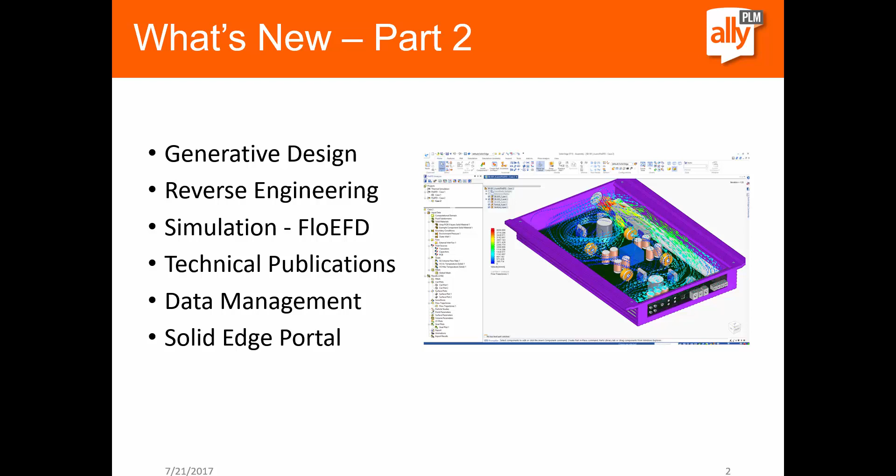The first thing I want to talk about is generative design. So welcome to the next generation of design.

If you consider the traditional methods of designing, you design your model to be as strong as possible to withstand the stresses applied to it, but you also want it as lightweight as possible to save on material cost. Once designed, you usually run a stress analysis to make sure it meets all the goals you've set for the part.

With generative design, we spend a minimal amount of time designing the actual features, get more of an overall shape created, add in a couple features like mounting locations, and then let generative design create the model for us so we don't have to spend as much time on the design work.

We set up those specific mounting points, apply some different forces, and let the software develop the part for us. This should save time on creating models, and it also does the stress analysis at the same time.

ST10 Generative Design has its own ribbon tab. All the commands are inactive until you go in and create a new study. If you haven't applied a material yet, it'll ask you to apply one. We also have a docking window on the side of the screen, which lists any loads or constraints you've applied to the model.

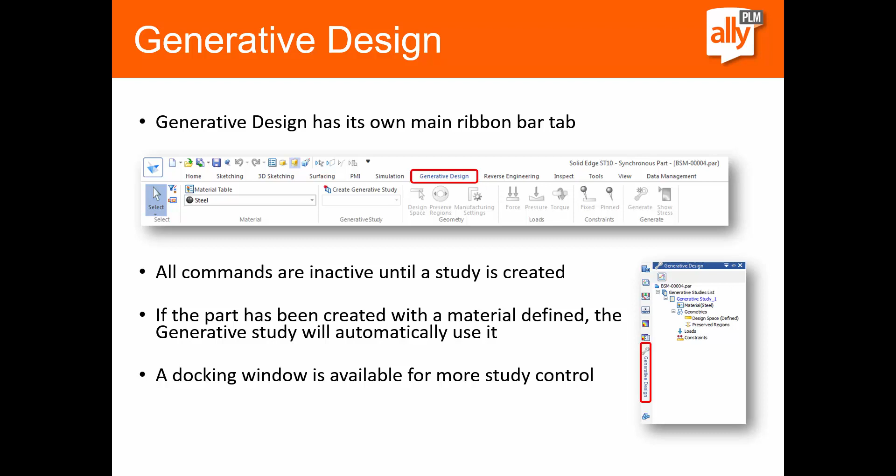Looking closer at some of the options in the menu, we have a design space option. This is available if it's a multi-body part. If it only has a single design body present in the file, then we don't need to use this. But if you have a multi-body part, you can pick which body you want to do the analysis on.

Then we can determine what regions we want to preserve. This is things like faces or holes we want to preserve so they don't get optimized, meaning we don't want material removed from that location. This is mainly for things like mounting holes and mounting locations.

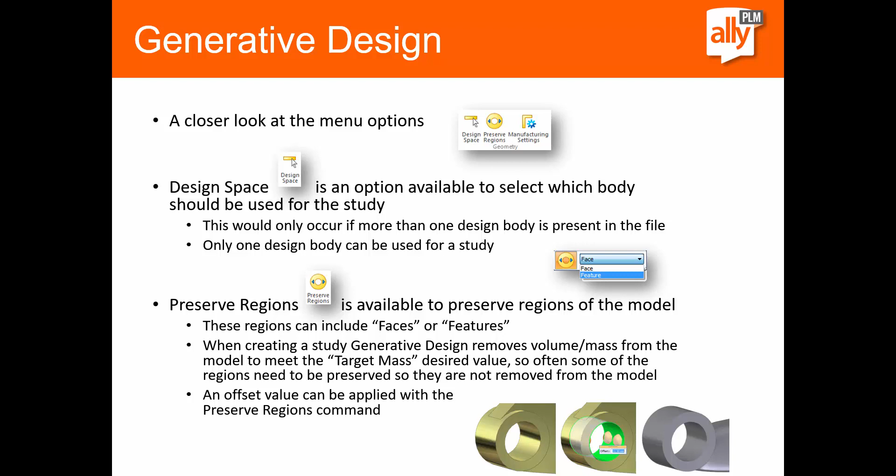There is a setting for manufacturing. This is used maybe if this is going to be a cast or injection molded part. We want to be able to get this out of the mold, so we can determine which way the overhang prevention should be, and we can remove any internal voids as well.

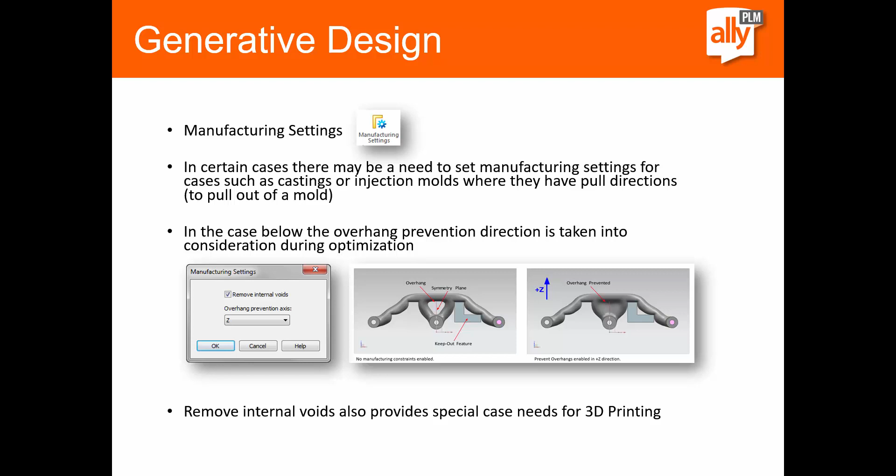Next, we can apply our loads and constraints to the model. We choose, just like in simulation, the types of forces and constraints we want to apply. In the picture at the bottom, we've applied two forces to the outside faces, pulling away from the model, and you see this is the finished generative model.

Also, in the middle of the hole, that is a preserved region, so we notice the hole maintains its shape, and we have a nice little offset distance away from it to keep some thickness around it.

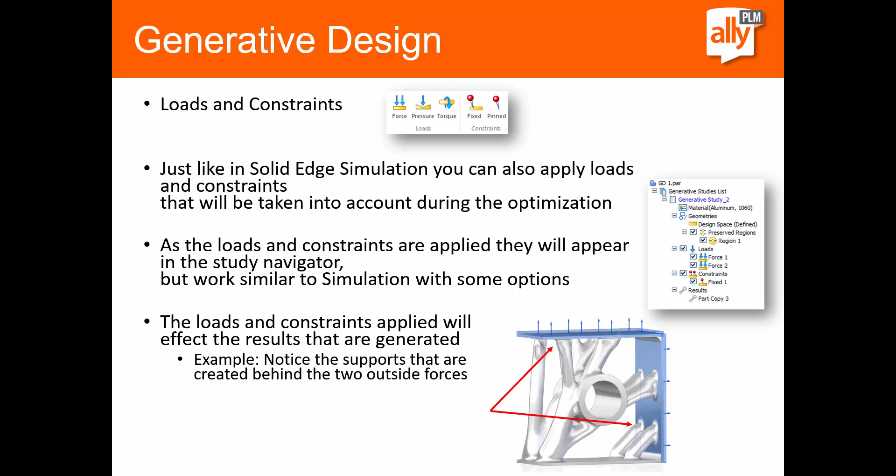Once you get all your loads and constraints applied to the model, we then generate the study. When you hit the generate button, an options window pops up. We can set the study quality, choose our target mass—either by a percentage or by typing in an actual target mass value—and then we have things like yield stress, allowable stress, and factor of safety down at the bottom as well.

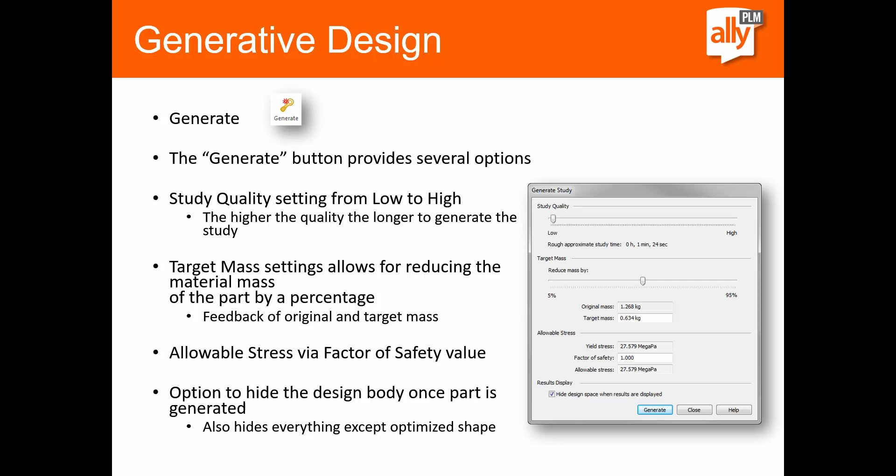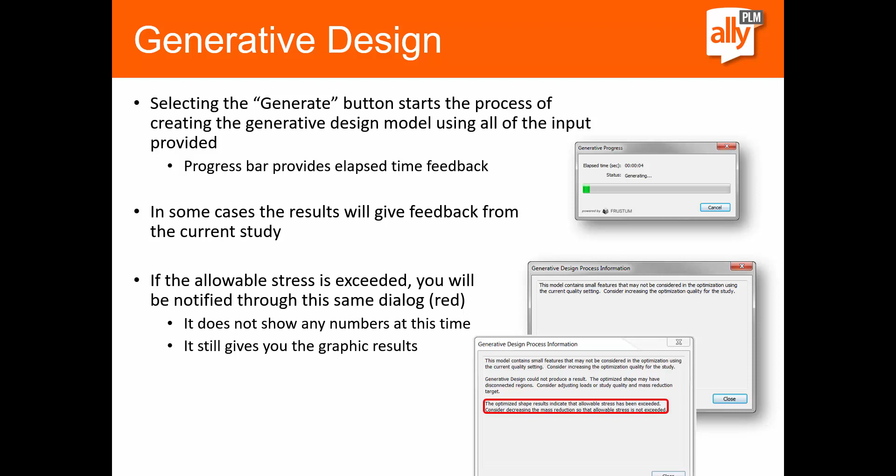When you run the generate button, it'll go through the process of creating the generative design model using all those input values that you put in there. You'll get a little feedback when it's done, just telling you maybe some features couldn't be optimized, it was too small of a face, and so on.

And if it fails or can't optimize it, it'll tell you that as well. Once it's done though, we can show the results. Again, this is a stress type analysis, so we get to actually see those stresses on the finished generative model. So let's go ahead and take a look at how this works.

For our example here, we're going to be taking a look at the Bernina sewing machine, and we're going to switch our display configuration to take a look inside at the main frame. And what we're going to do is create a generative design study on one of the parts. I've got kind of a base part designed already that's going to fit between all of these components, so I'm going to turn that on.

And we see again, it's really just a basic shape. We've got some of the holes built into it where we need to maybe mount it or have some of the shafts go through. And what we want to do is create a more lightweight design, obviously to save on some material costs.

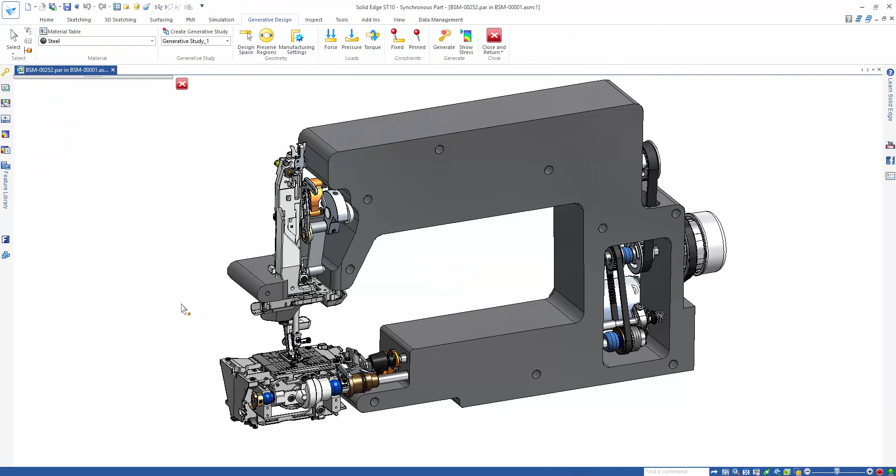So I'm going to edit into this part file. We'll go ahead and hide those background components, and you see up here I'm already up on the Generative Design tab, so this will be included in here for you to use. I've got a material applied.

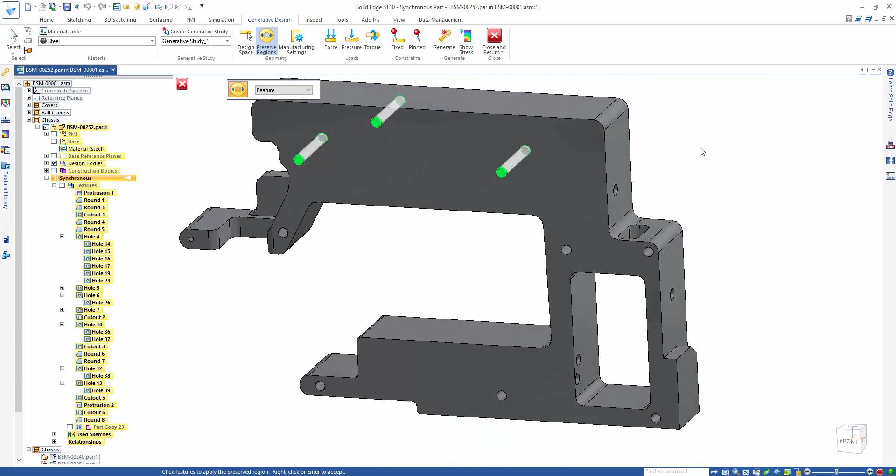We've already started one of our studies, so we can go through then and start to define maybe some regions we want to preserve. So if I do the Preserve Regions command, we get to pick either faces or entire features if we want to preserve. So I'll just go in with the feature option, pick some of the holes in here that I want to preserve. Again, maybe those are some sort of mounting holes, or these ones over on the side, or where some of the shafts run through. So I just want to preserve those.

Next thing I can do is apply maybe a force. So we're going to have force applied actually down on this face. I'm just going to flip it so our force is pointing down, and obviously you can see we can input whatever force value we need down there in the value box.

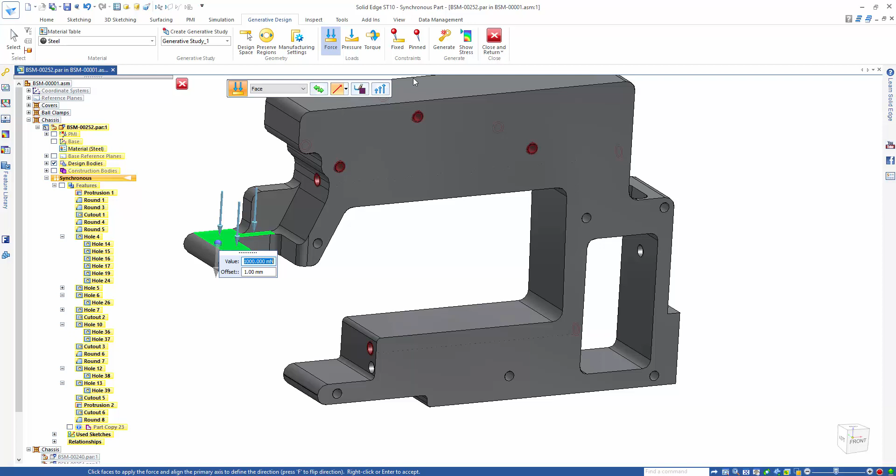Next, I'm going to fix one of the faces. I don't want this face to move. I want it to stay stationary, so we're just going to fix that one in place.

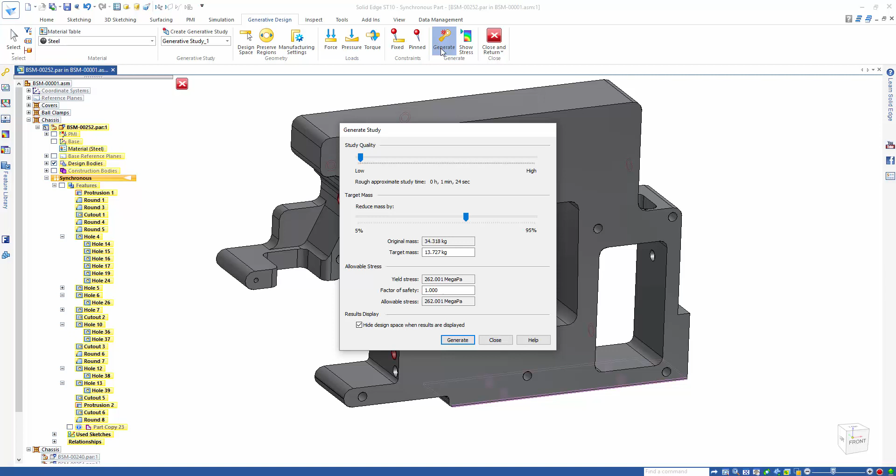Once you get all of that applied, we can then go in and hit Generate. And in the Generate option, we get to pick our study quality. We can slide that up and down. You select how we want to reduce our mass by maybe a percentage or a target mass that we want, and then factor of safety, and we would hit, obviously, Generate.

I've already got this done. It does take a little bit of time, so I'm simply going to turn that on. So we can see it there. I'm going to hide these other constraints we've applied. And we see our results.

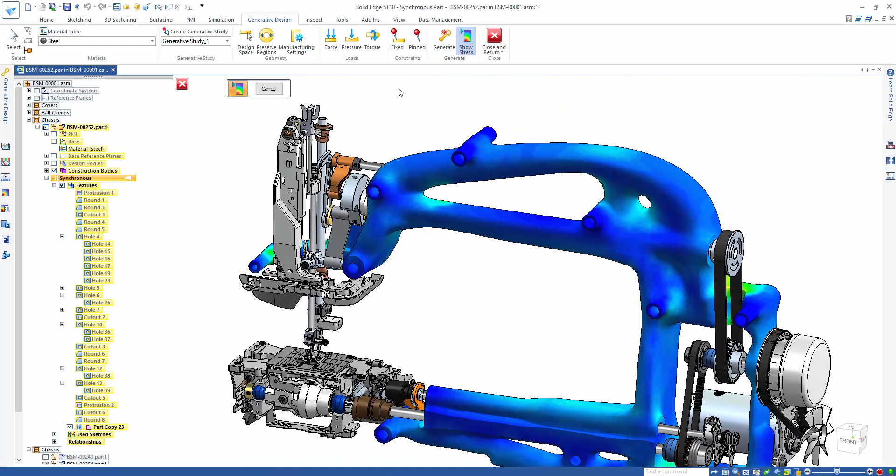And if we go ahead and turn back on the background components, we can see how it preserved those holes we selected, but it removed geometry to make this more lightweight, yet still strong in the way that we need it to be. If we turn on the stresses, we can then also see kind of where maybe some of the weak points are, and we could decide, maybe I need to preserve some other regions over in this area so we don't have such high stress there.

So you can go back in and run the study again and get a different body, and you can pick and choose which one you want to use.

To use this actually in our assembly then, we need to detach the body from the study. It's currently just a mesh body. It's just construction geometry, so I'm going to detach it. That will allow me then to come in and convert that construction body to a solid body.

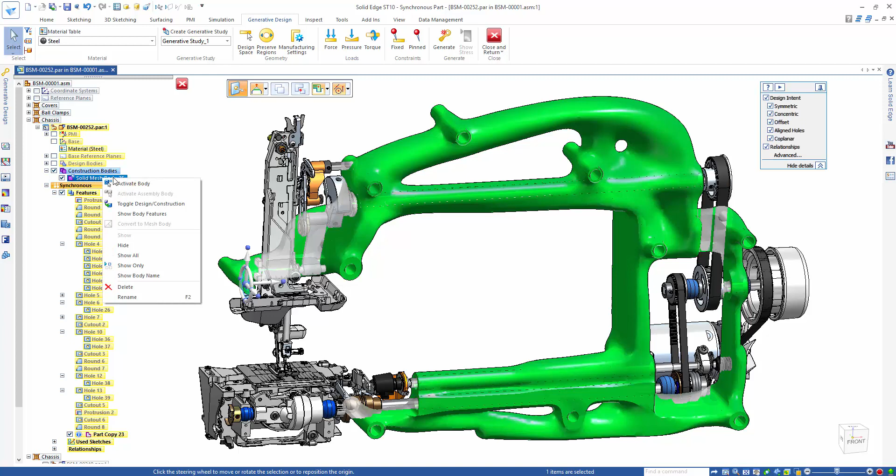So I'm going to right click and toggle it to Design. And the other body, that square one that we started with, I'm just going to toggle that to construction so we don't have to see it right now. And then there we go. We can see our solid mesh design body.

We're going to take a look at another example for that. We'll zoom in on this part up here. I'm actually going to open this guy up.

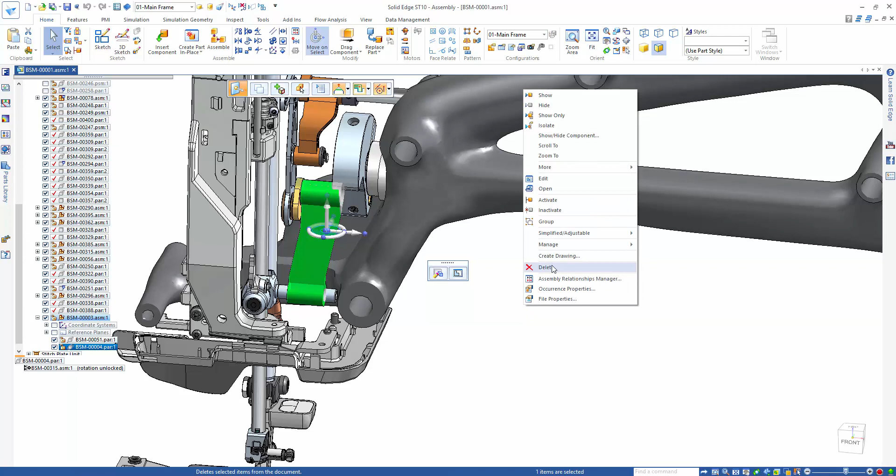We're going to do another generative design study here. So I'm going to pick a material this time, maybe just a steel. We'll hit Create Generative Study. And now again, we get to decide where we want to preserve regions, where we want to apply forces, and I'm going to put a force going through the center of this hole with an offset of 2 millimeters, just so we ensure we get the outside faces of that cylinder as well. Same thing with the fixed constraint over here on this side. We'll do an offset there as well of 2 millimeters.

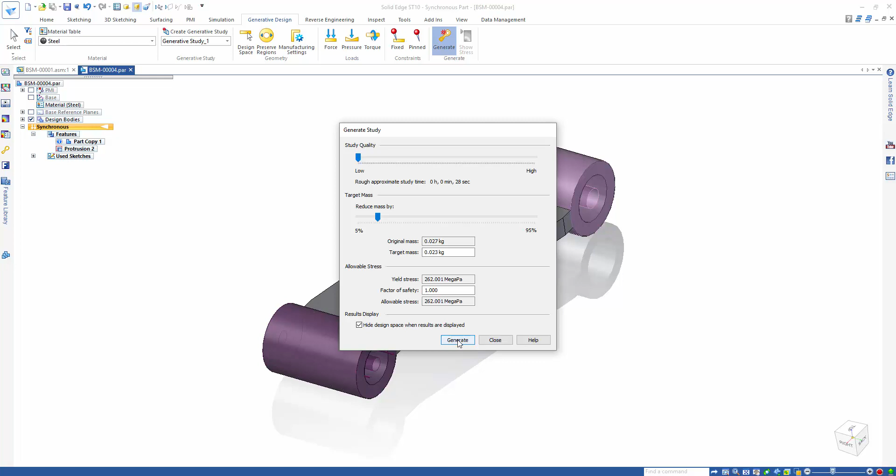If we go into the Generate window, I'm going to just slide this all the way down to the lowest setting, just so it goes a little faster for you guys to see it, and we'll choose to reduce the mass by 15%. And if we hit Generate, it'll go through and generate our generative design. So what it's doing, it's meshing the model. So it's doing a simulation type solve. It's tessellating it. Then it's going to go through and try to optimize that and reduce the most amount of material that it can, while still maintaining that factor of safety that we needed to maintain the yield stress that we had in there as well.

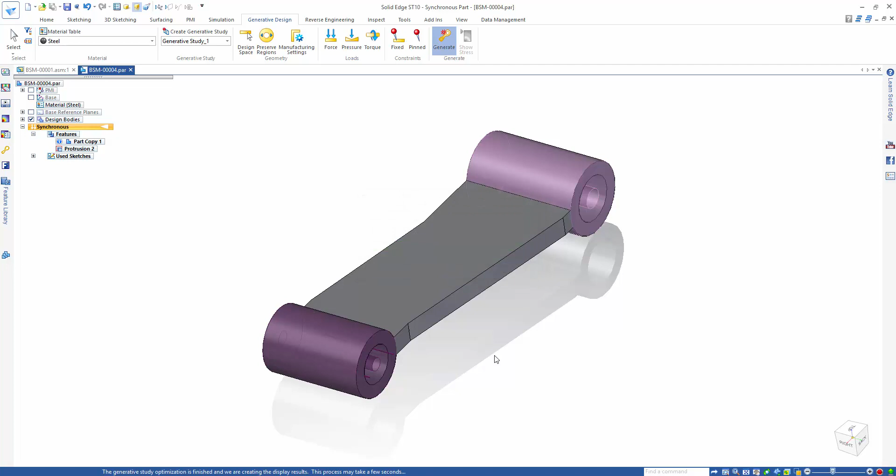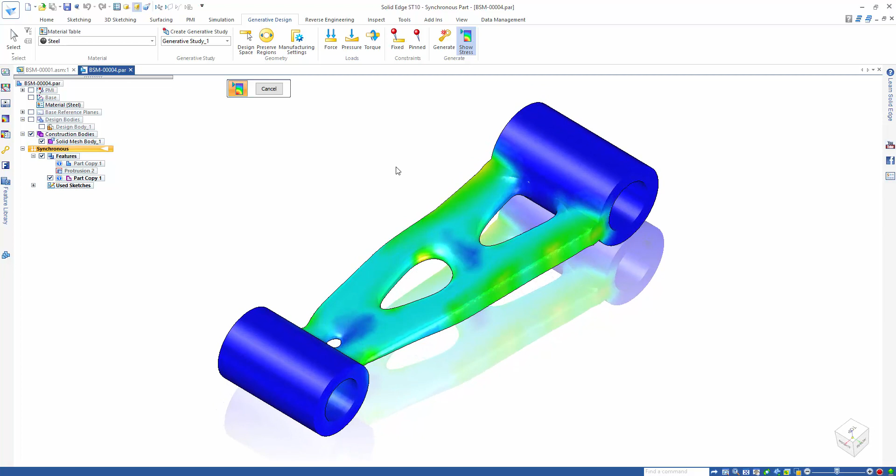So there we go, it finished. We can see that it pops up a little window saying that maybe it couldn't go through and optimize every little face. There are some small corners or things it couldn't do. That's okay, we'll just hit close on that for now. And we can see our finished part. So pretty cool. We can then go in and show the stresses. We can see where the highest stress points are. If we're not happy with that, we can always go back in and regenerate the study, adjust some of our inputs, and get a new design.

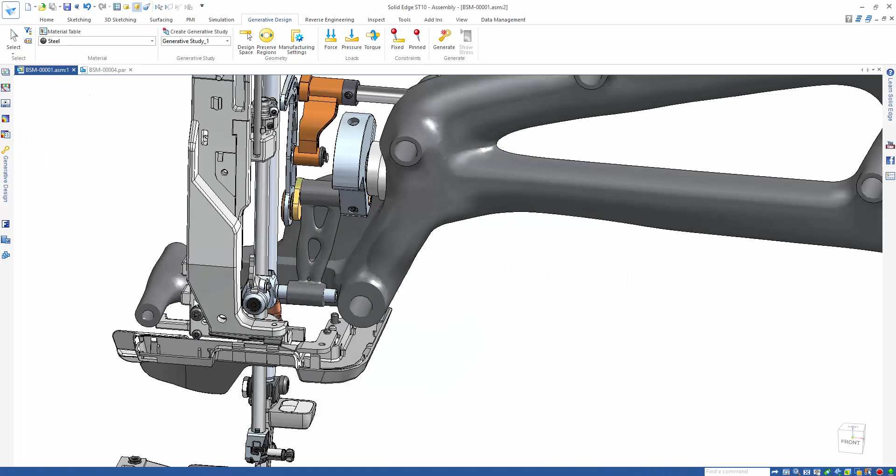Just like with the last one, I'm going to detach that finished generative body from the study, convert that construction body to a design body so that we can then see it and use it back over in our assembly. So that's now our design body, and if we head back over into the assembly, there's that finished generative design model. So some really cool stuff here. I've had some time to be able to 3D print some of these parts as well, which is awesome. This works perfect for that. So hopefully this will give you guys maybe an idea of how to reduce mass on your parts, where you can remove material from, and how to end up with some really cool parts.

So our next topic inside of ST10 is reverse engineering. I know a lot of people have been asking for this for a while. It's now here. It's included inside of ST10. This is available on ST9 as a beta add-on, so you can go download this today and add it into ST9 and try it out. But they are working on it more. It'll be added here in ST10. It's really great. You guys will be able to bring in and kind of reverse engineer some parts, any 3D scan data, anything like that. We can bring it into Solid Edge. We can build surfaces on top of it, and we can use that inside of our models.

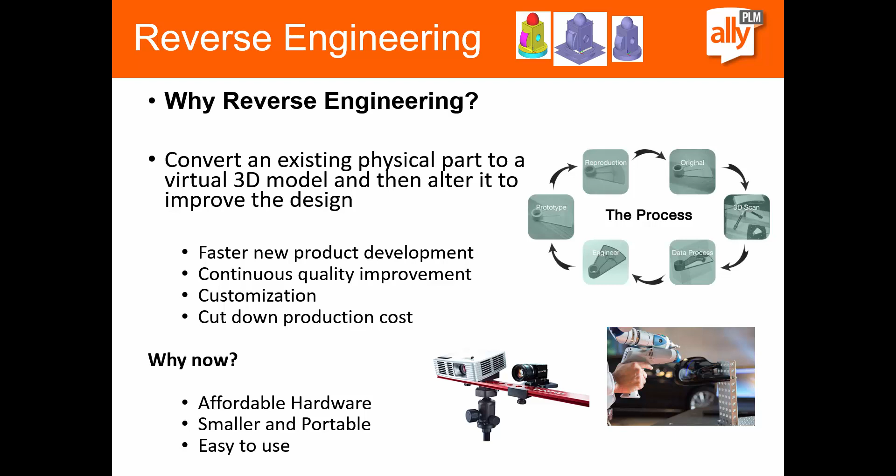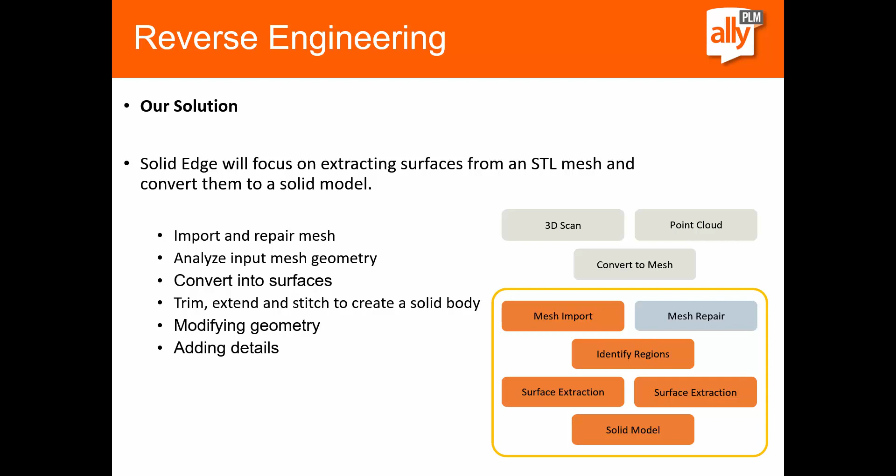So the solution here, again, inside of ST10, we take those STL mesh files, 3D scanned in data, point cloud data, and we can convert that using some commands here that are built into reverse engineering. We can import the mesh, we repair the mesh, we then analyze it and identify different regions on top of it. From those different regions, we extract surfaces. After we get all of our surfaces extracted, we then do some surface trimming and stitching, and we create then a solid model. Here's a couple examples of what that kind of looks like.

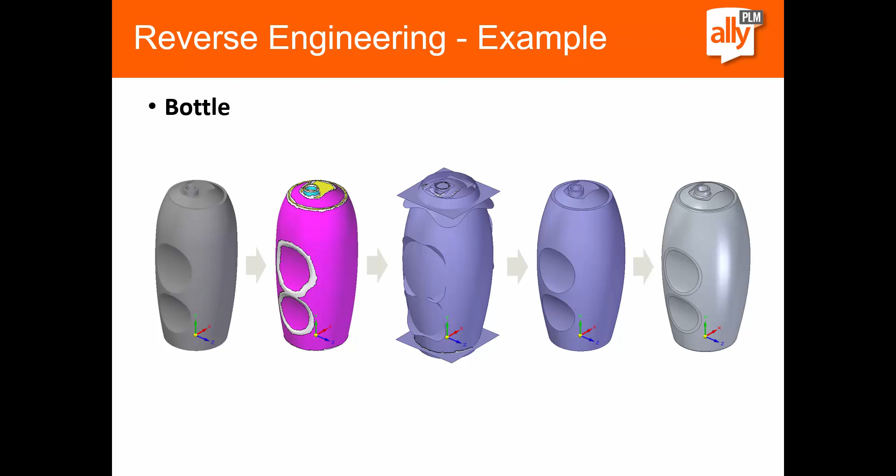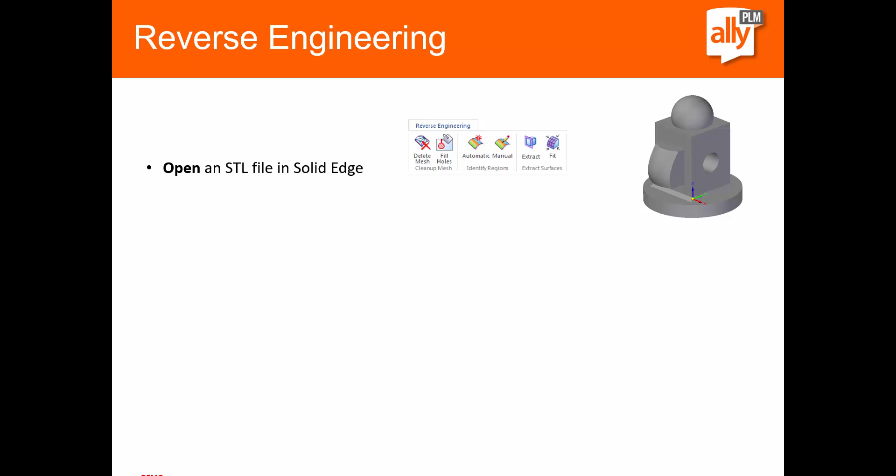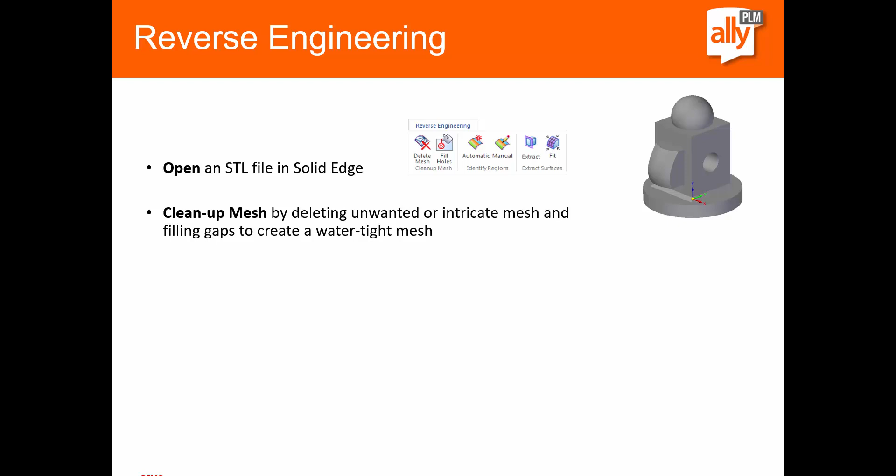So here we see the reverse engineering tab in the ribbon, and we have a couple commands. We go through and we open up our STL file inside of Solid Edge. Then we try to clean up the mesh by deleting any unwanted surfaces or intricate mesh that might be hard to identify as a region. We fill those gaps in with the fill holes command.

We can then run the identify regions, doing the automatic or the manual option to identify planes, cylinders, spheres, B-spline surfaces, etc. We then extract surfaces using the extract command, but we can go in and fit surfaces manually as well. Then we'll trim those and modify those using your standard surfacing commands, and then stitch it together and create a design body. So some really nice commands here that allow us to work with that STL data. So we're going to go ahead and take a look at an example of that.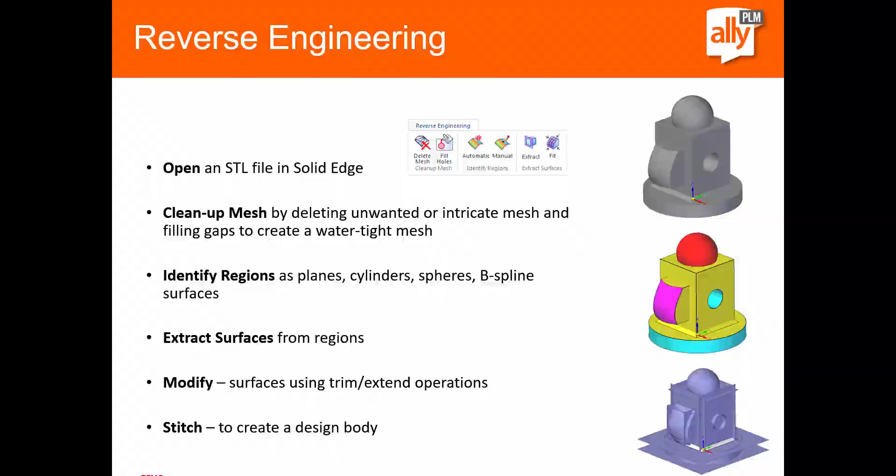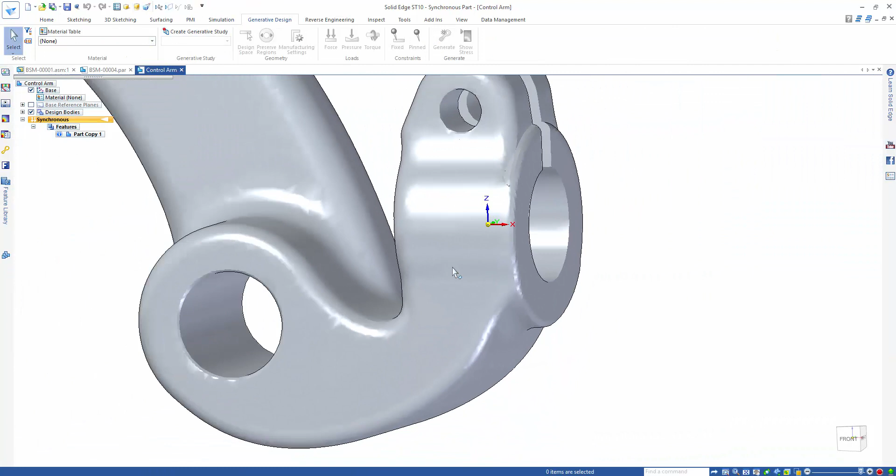For our example, we're going to open up actually an STL file. So I'm going to go into my folder here and select an STL file, and we're going to open that up just in an ISO part template. And we can see the part file here. So it's mesh data, and what we want to do is take that mesh or STL data and make some changes to it. So one of the first things we want to do is maybe delete this mounting hole up here at the top.

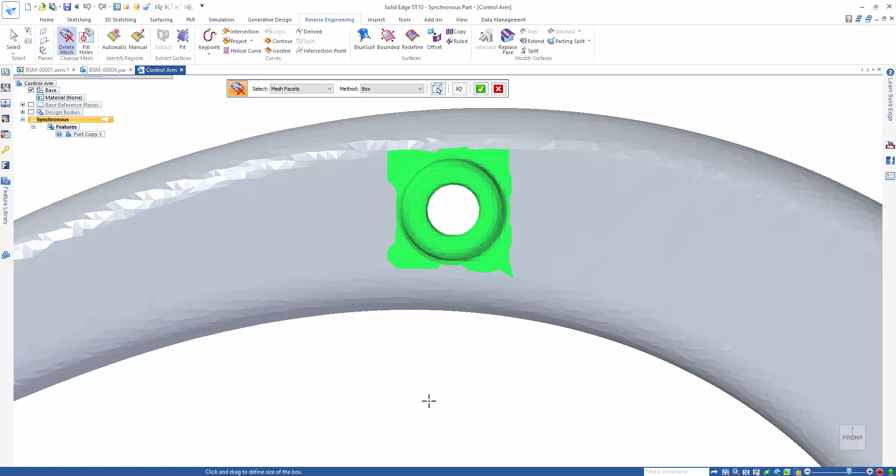So I'm going to zoom in on that, and we're going to choose the delete mesh command, and I'm simply going to fence select what I want to delete. I just want to get rid of that entire hole, and we'll accept that, and that's going to cut all the way through the model and cut off that hole on both sides. Then we want to fill in the holes that we just deleted, so we're going to run the fill holes command.

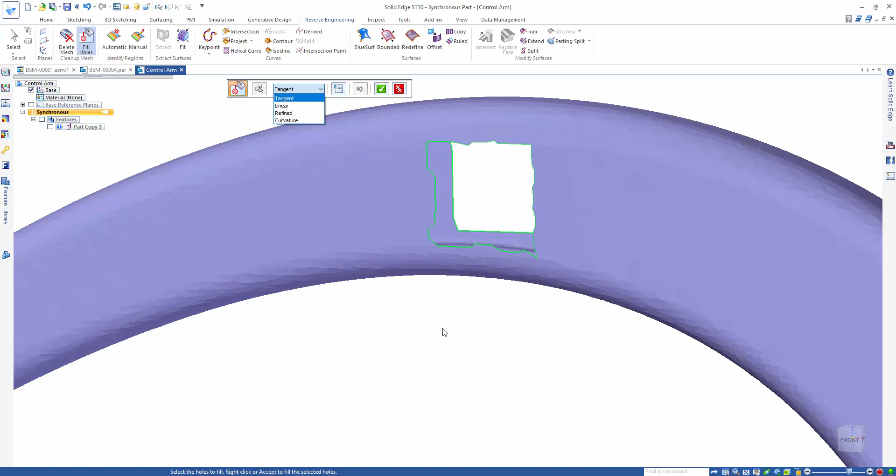This is going to automatically find those holes that we just created. We can choose how we want to fill in the holes, if we want them to try to be tangent to the existing geometry, linear, curvature, whatever we need to do. So I'm just going to leave it on tangent and accept that. And it fills in our holes. So we can see those filled in on both sides of the model.

Now what we want to do is we want to actually extract some surfaces from this so we can maybe mount it in an assembly or use it for something else. So there is an automatic option, but we're going to go in and do a couple manual region identifications here. So I'm going to go in and identify the region on the inside of the cylinder. So I'm going to do the manual identify. And really easy to do. You're basically just going to paint the surfaces.

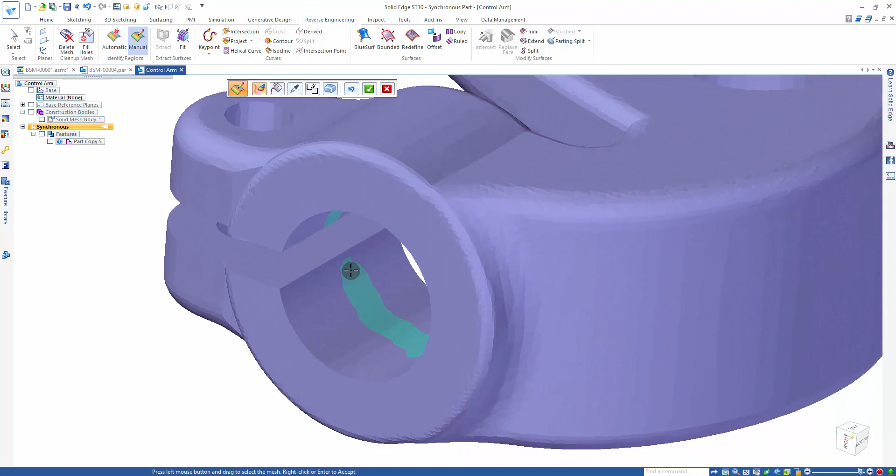So I'm going to paint how deep that hole is, and I'm going to paint all the way around the inside circumference of the hole. So I'm just going around painting those. You don't have to paint the entire face, as long as you get kind of the overall size, the circumference, the depth, and accept that, it'll figure out then the cylindrical surface you want to put on top of that. So we've got our region identified.

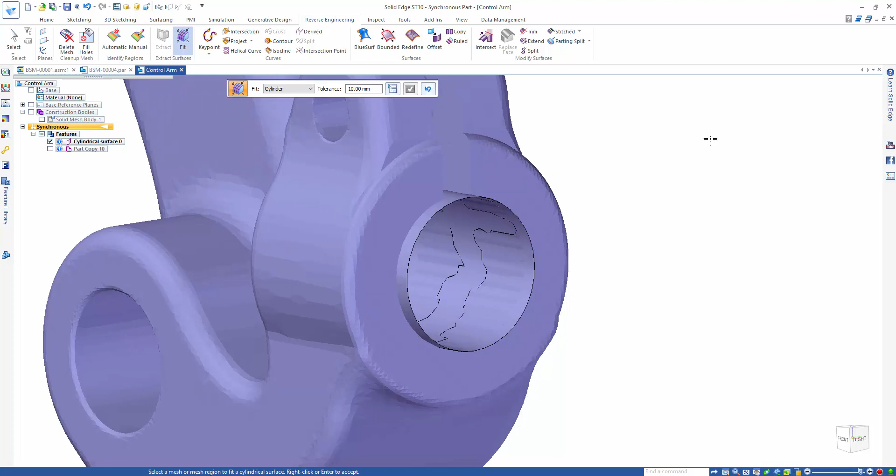We're then going to fit a surface to that, and we get to choose what type of surface we want to fit: a plane, a cylinder, sphere, etc. And we want to do a cylinder. I'm going to pick up that region and accept it, and it will automatically then create a nice little cylindrical surface for us. Alright, we're going to do one more. We're going to paint this outside face here as well. So I'm just going to go around the outside.

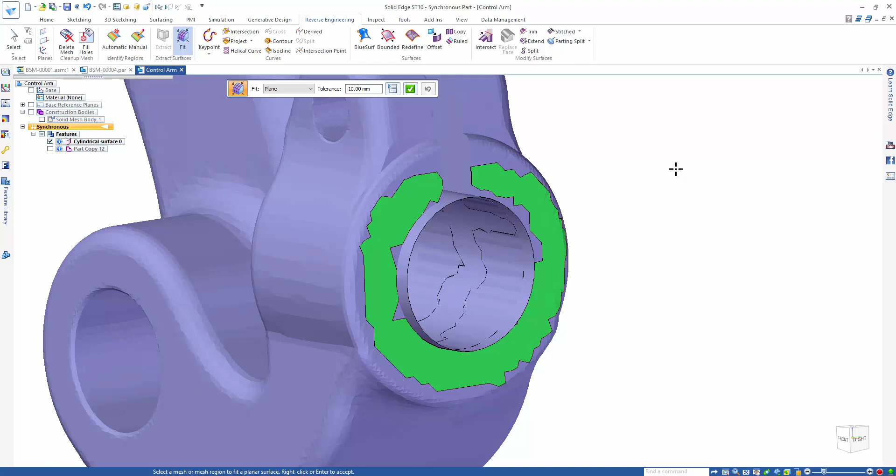We'll accept that, and then we're going to fit just a planar surface to that one. So do fit again, leave it on plane. We're going to select that surface and accept it. And now we have our two surfaces. So if we toggle that on and off a little bit, you see how it fits perfectly with that STL data. We can then go in and use something like intersect and trim these two surfaces.

So we'll get rid of the middle and that extra little piece. And there we go. There are surfaces that we can now work with. Again, use this to mount this maybe in another part file, something like that. So some really cool options there with the reverse engineering.

So as you saw during reverse engineering and generative design, I may have mentioned something called a mesh body. That is new for ST10. We're able to work with mesh bodies. We can do adds and subtracts from them. We can also do Boolean operations with them.

So having this functionality to be able to work with mesh-based modeling is really what's new in ST10 and allows us to do a lot of the new things. The mesh bodies are available downstream for use in assembly and draft files as well. And like I mentioned, we can do the Boolean operations.

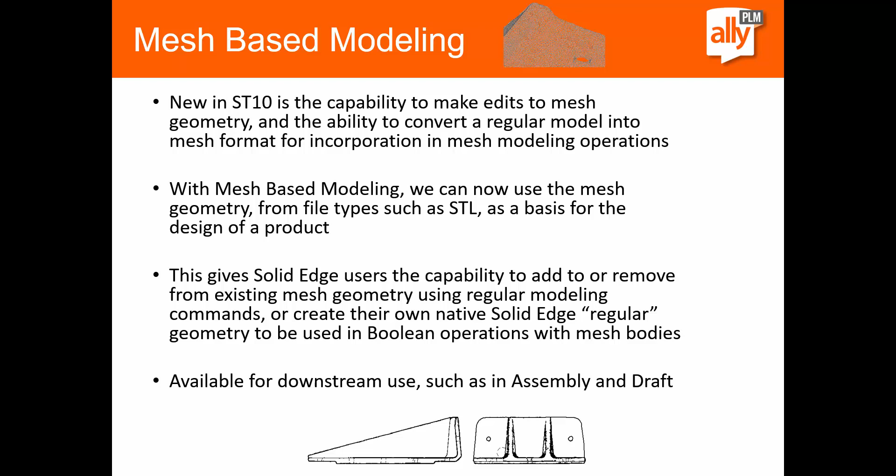So a little more information on the Boolean operations. They are available in ST10, although the target body has to be meshed to be able to do this. Now, we can actually take existing design bodies and convert them to a mesh body to be able to do this if we want to. When you run the convert to mesh body command, you're going to get an options dialog box that appears.

That allows you to pick your conversion tolerances and your angles of how you want that mesh body to end up. When we convert it to a mesh, what you're doing is basically tessellating the body. You're adding a bunch of little faceted triangular surfaces all over it. So this allows you to adjust that tolerance and how accurate you want it to be.

The nice thing about this is if you do this in the ordered environment, we can always roll back because it's history based. So if you are working in synchronous, I would suggest waiting until the end, transitioning into ordered, and then doing your convert to mesh body.

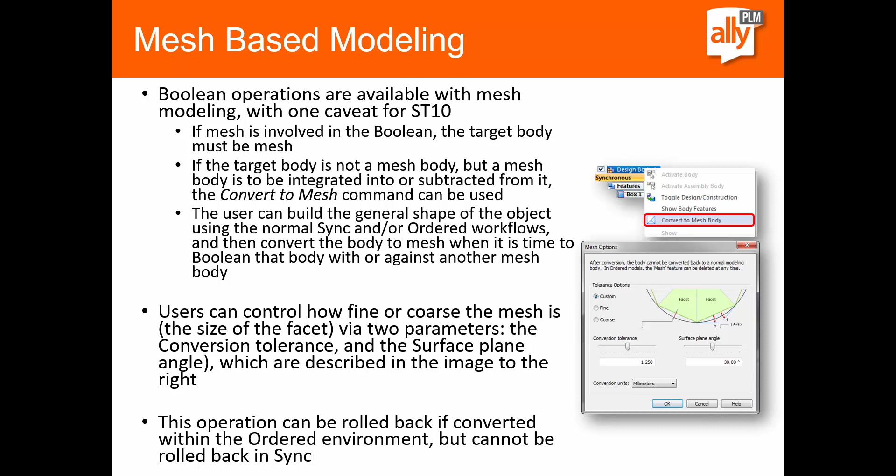Some of the rules, if you're going to try to do a Boolean with mesh bodies: if your tool body is mesh, your target also has to be mesh. If your tool body is a classic BREP, so just a regular Solid Edge file that you've always worked with, your target can be a Solid Edge body. But we can also have a regular Solid Edge classic BREP file as the tool, and then the target can also be mesh. You can't, though, have a mesh tool body subtract from a Solid Edge classic BREP target body, so just keep that in mind.

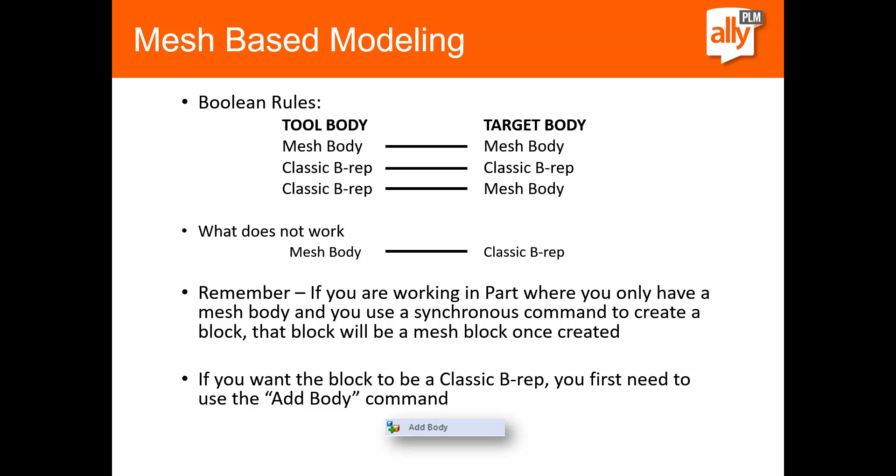Some of the capabilities of the mesh command: in assemblies we can add assembly features to it. We can do things like mates and drafting. We can add drawing views and section views of them. We can do some interference checking, goal seek, zebra stripes. You can also pattern and mirror mesh bodies as well.

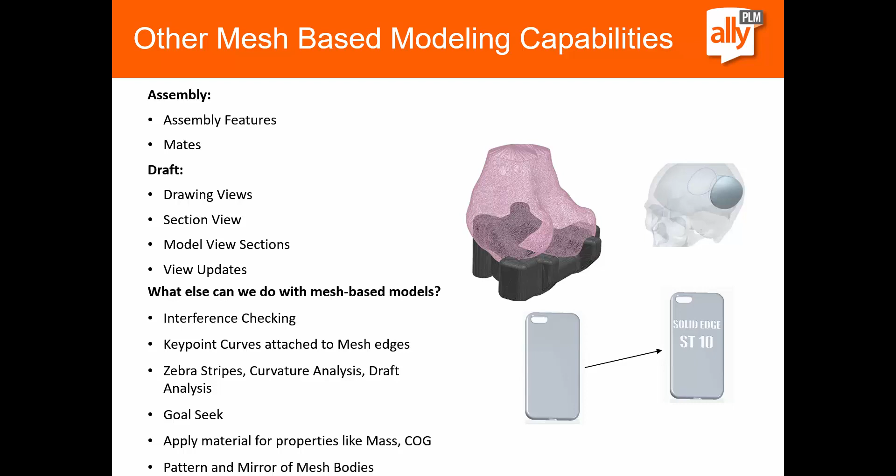Some of the restrictions: the mesh body doesn't really have the functionality to add dimensions to it. The mesh features are not editable in synchronous because it is made up of a bunch of little faces. There's no way we can push and pull that with the steering wheel. A lot of the recognize commands won't work either, so if you're in synchronous and you want to recognize holes or recognize patterns, those will not work.

Same thing in the ordered environment. If you try any of the resize or delete commands, those won't work either. So just keep that in mind. And let's go ahead and take a look at this and see how this works.

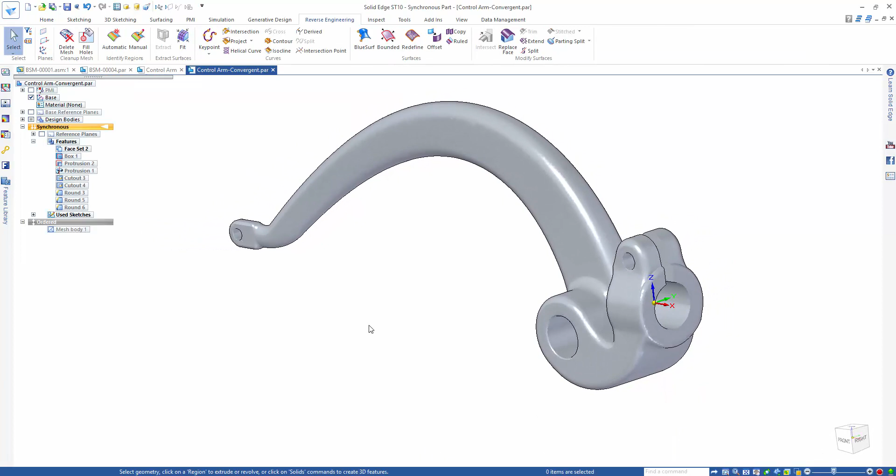We're going to open up another file. And I have a part file here that is actually just a mesh body, and then we also have a solid body in it as well. I'm going to switch back up into synchronous, and again, this is just our mesh body. We want to go in and make some changes to it.

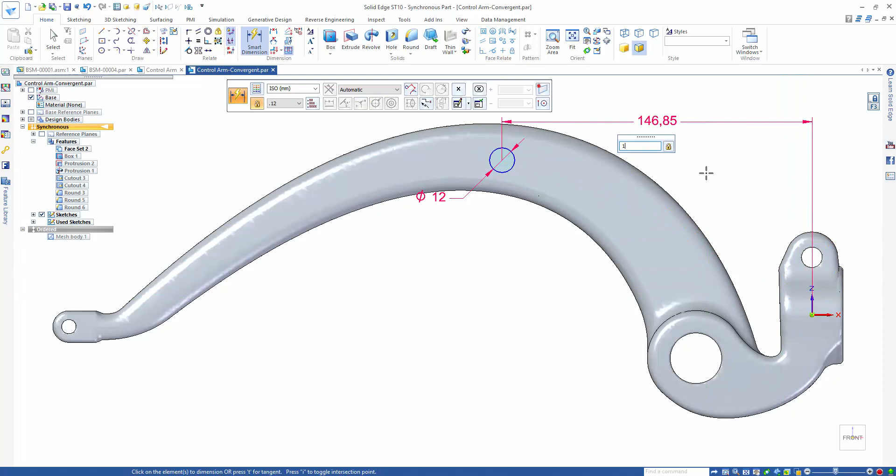I want to add maybe a hole to it, so I'm going to take a look at the front view here, and I'm going to sketch just a circle to begin with. We're going to make that a diameter of 12 millimeters. We're going to dimension that off of our base coordinate system. And then since this is synchronous, I'm simply going to grab that region and then cut it all the way through the model.

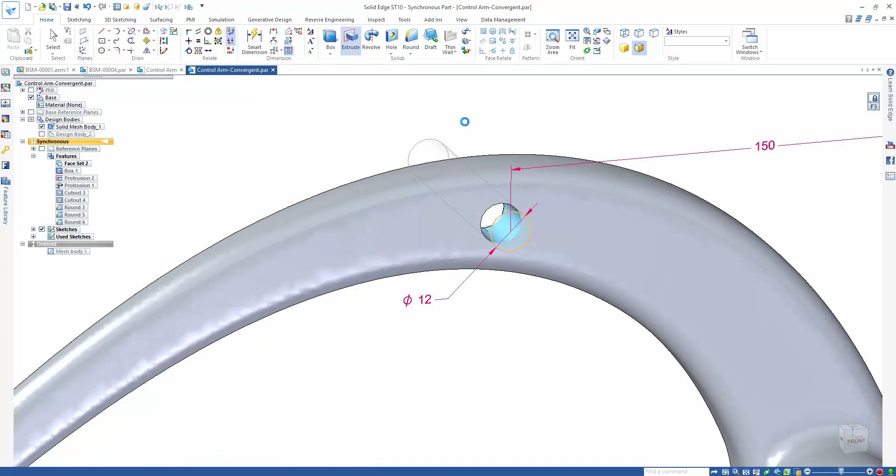And again, this is just a mesh body, so it's just faceted imported data maybe. We want to go in and just do a cutout. We can simply do that by drawing a hole and cutting it through the model. And there we go, we've got our cutout.

Now if you hold your cursor over it, it will say in the flyout that it is mesh. So it's not an actual hole. We can't go in and change the size of it. It is a cutout though in the mesh body.

Another thing we maybe want to do is add some text to this guy. So I've got a reference plane already created. I'm going to lock onto that and just draw a sketch line that we're going to use to add some text. So I'm going to do maybe a part number that we want to add to this guy.

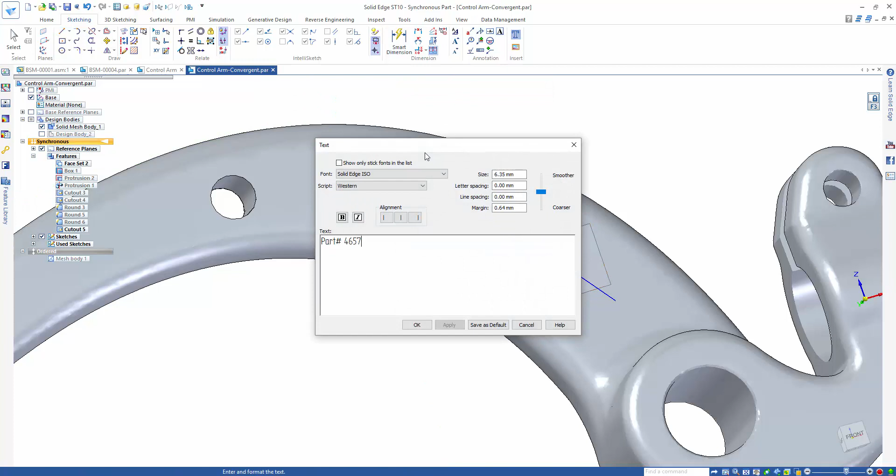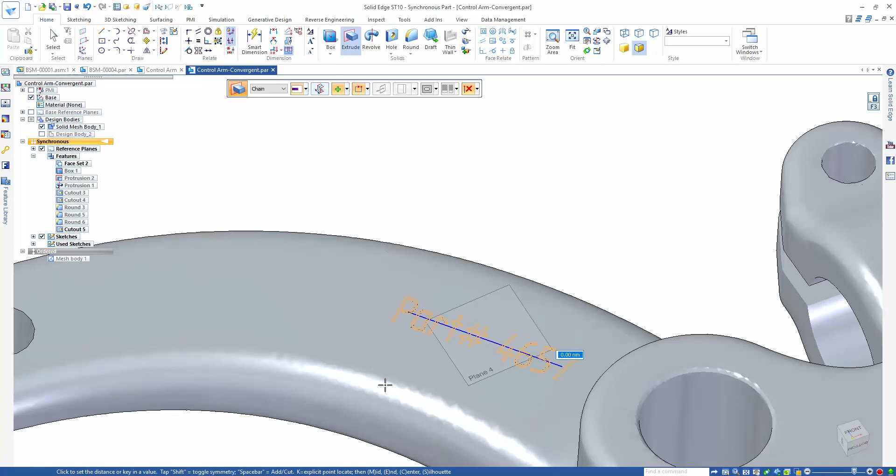We'll center that up onto our sketch line. And then I'm going to go in with the extrude command and select our sketch we just created. And we're going to add that geometry down into the model. And there we go. So we can go ahead and turn off our sketches and reference plane, and we can actually add geometry into it as well.

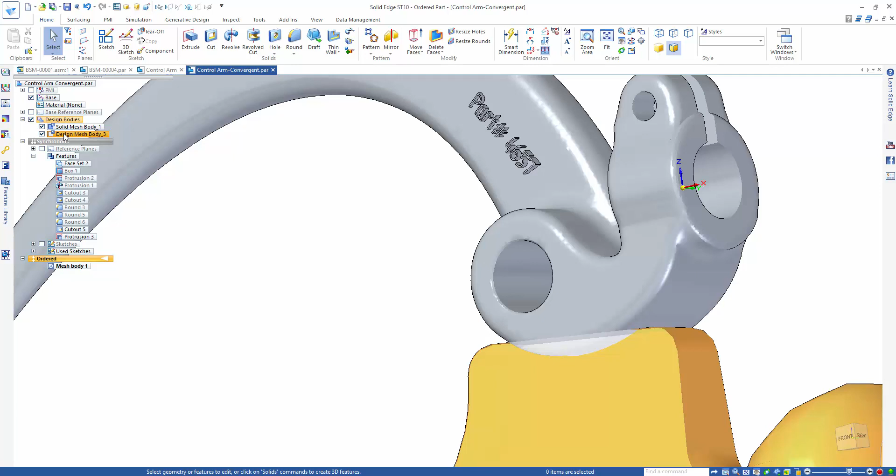Now, to do one of the Boolean operations, I'm going to switch over here into the ordered environment, and we have a second design body that I created, and that's what all of these features are that we see listed here in the Pathfinder. They're to create this body here. This was created in synchronous, and then we did a convert to mesh. To do that, you simply right-click on one of the bodies, and there's the convert to mesh body command. So it's already been converted, so we have our two mesh bodies.

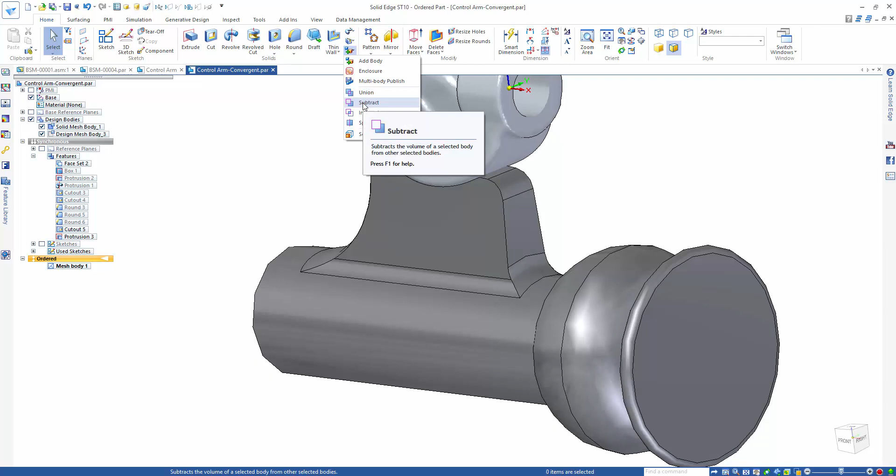We can simply go up and do a Boolean subtract. I want to subtract from the top body, and I want to use the bottom mesh body as our tool to do the subtract from. And there we go, we see our cutout. If we hide that second body, we can see the cutout a little better.

Now I have a PMI dimension attached to the original synchronous part. We're going to use that to change the width of the cutout, and that's actually going to drive the cutout here in that mesh body as well. So this is really kind of the best functionality of doing that convert to mesh. Maybe create your tool that you're going to do a Boolean subtract with in synchronous, transition over into the ordered environment, and then do your Boolean operations.

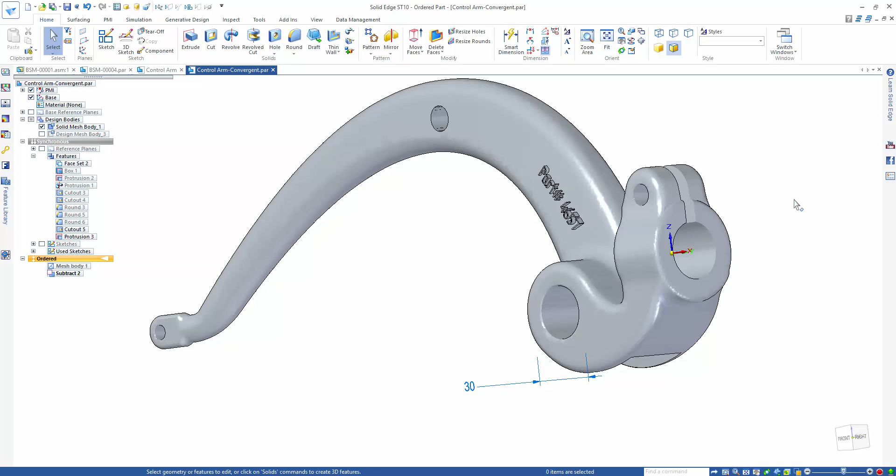So with convergent modeling here and being able to work with mesh bodies, we kind of get the best of both worlds. We get the best of the imported STL data, the best of the Solid Edge data. We can bring it all together and do whatever sort of modeling that we need to do.

Alright, the next thing we're going to take a look at is CFD. So what is CFD? CFD is Computational Fluid Dynamics. It's a virtual simulation of fluid flow and heat transfer. So we can look at different fluids like liquids or gases. Now inside of Solid Edge, this is actually called FloEFD. That's the name of the program, and E stands for engineering.

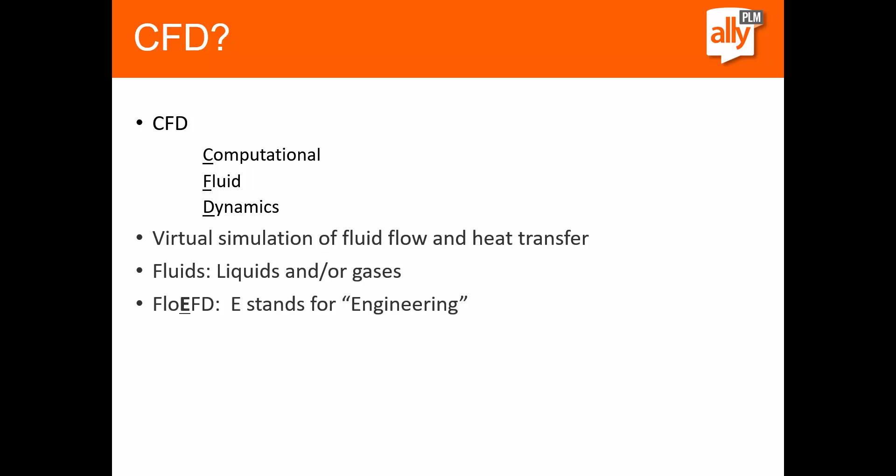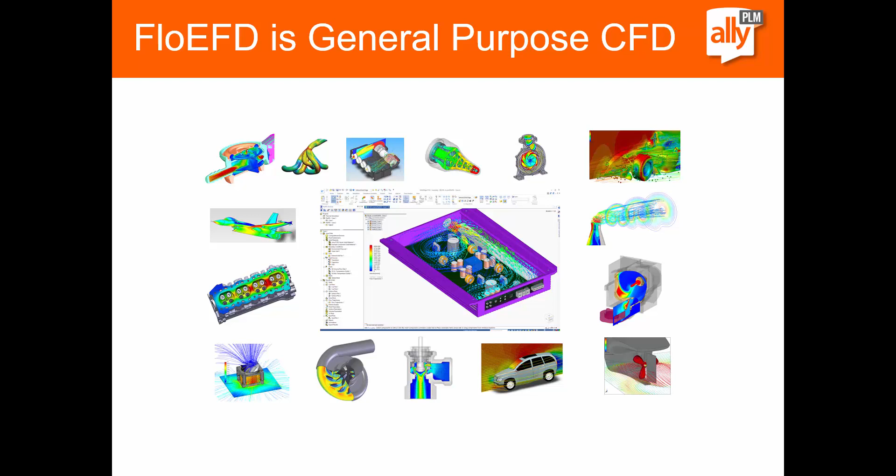So FloEFD, it is a general purpose CFD software. We see some examples here of the different types of analysis that we can do inside of the software. I've got a slide here in just a second that'll be more descriptive of the different types of analysis we can do. The nice thing about FloEFD though is it's actually built right inside of Solid Edge. If you've used the regular simulation inside of Solid Edge, it works similar to that. It looks similar to it, so it's really easy to use. And I've enjoyed playing around with it and being able to test it out.

So the FloEFD, again, it's a general purpose CFD software. We can do fluid flow and heat transfer analysis, and it's embedded inside of Solid Edge. So unlike all the other CFD tools, this one is augmented by analytical empirical models, which make it easy to use for a wider range of users, including myself. Basically what that means is it's easier to use, it gives you faster answers with a high level of accuracy.

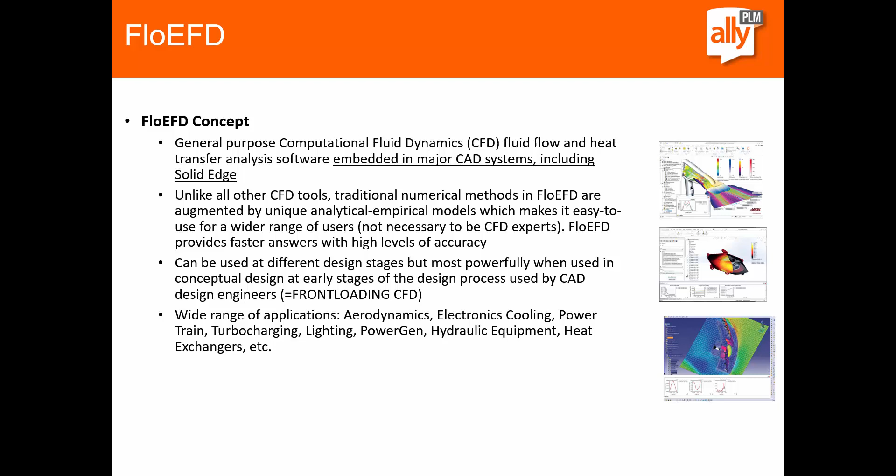The nice thing about it is we can use it at different design stages. So as you start to develop the model, you can go in and do different analysis and determine what changes you need to make as you develop your parts or models. There's a wide range of applications, and I've got a couple of those here.

We can find things like pressure drop, so if you're looking for filter or pump efficiency, heat transfer if you're trying to cool electronics or a heat exchanger, mixing processes. Maybe you're doing injection molding and you want to see how things are going to mix. HVAC, furnaces, combustion, flow fields for cavitation prediction, intake and exhaust manifold design, and even some force prediction.

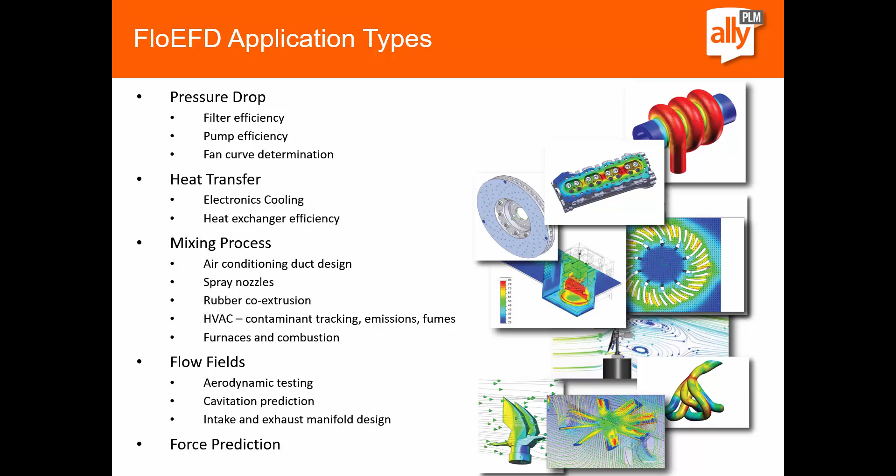Some other things that were new inside of ST10, some things on the manufacturing side. We've had some enhancements made to CAM Express, some new functionality added in NX11 with adaptive clearing, which is really useful. It makes your machining times faster.

There is also a new cloud-based hub being worked on to help out with your post-processing. You can look up the different types of machines you might be using and see if a post has been developed for them. Some really cool stuff there coming in the future.

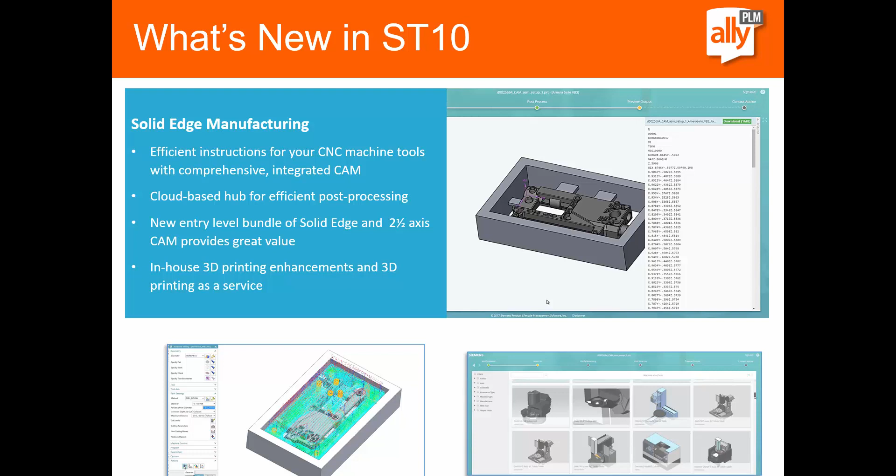Technical publications as well has been added in ST10. We have Solid Edge illustrations, which we can quickly use to create detailed illustrations of the designs. We also have Solid Edge 3D publishing, which allows us to create interactive catalogs, manuals, work instructions, anything like that. Really easy to use software here, and it's associative, so if you make any design changes, all of your manuals will update automatically for you and save you a bunch of time.

On the Teamcenter side of things, we now have part classification, supported through Active Workspace. There's a work offline mode where we can work offline at a customer site, come back to the office, and synchronize any updates you might have done. The user interface has been improved inside of Solid Edge, so it's easier to work with. And for anyone looking to get into Teamcenter, there are some new bundles provided as well.

For the built-in data management side, we've had some enhancements made here. We had enhancements to revision management, faster access to our associated drawings with a new Open Drawings button, and we've improved the Design Manager utility. It just helps reduce time spent on all of your tedious data management tasks. You can now do a full text search in all of your drawings, and it's now a little easier for admins and IT to set this up and get it running.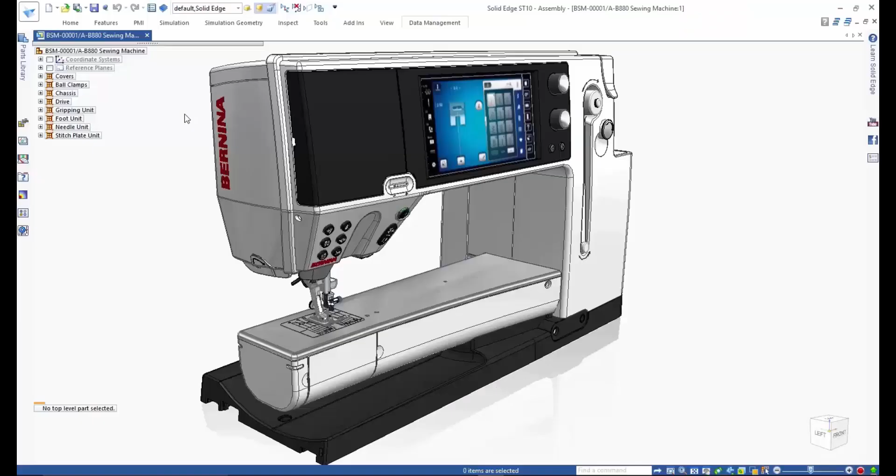I'm going to show you a quick demo of the built-in data management. In this example, our assembly has many parts and sub-assemblies, and we want to make sure all the parts are the latest revision and that they're released for manufacturing. So we're going to change the display configuration to look at the internal components, and then run the Get Latest command from our data management ribbon.

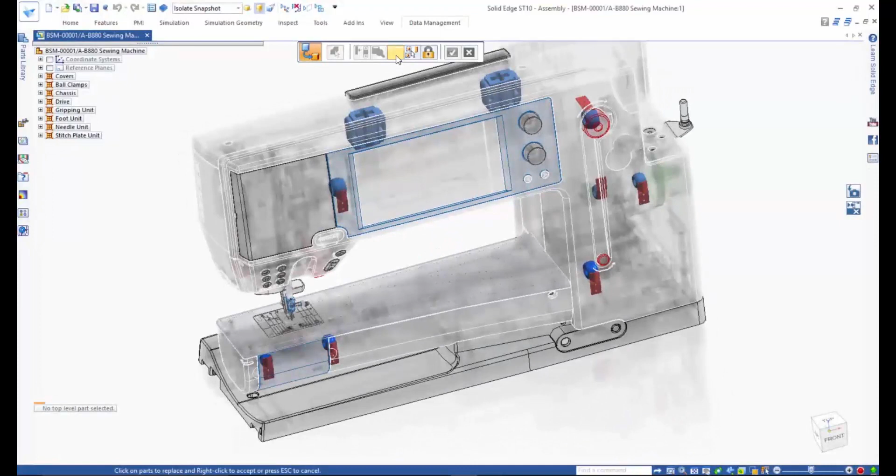The parts that have the latest revision available are highlighted - these are the ball clamps we see here in red. All the other parts are ghosted and made non-selectable. So what we can do is turn off the display of the ghosted parts, as well as toggle between highlighting all parts with later revisions or only those with the latest revision status.

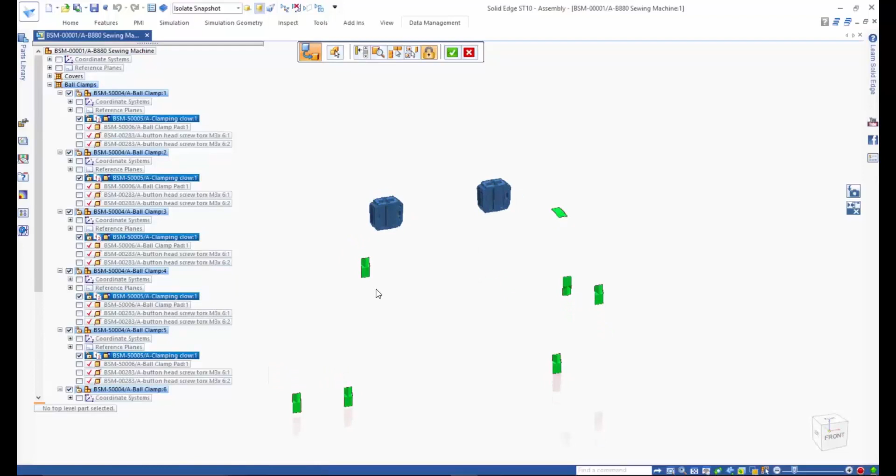We can individually select the parts we want to replace with the latest revision, or we can do it for all the parts. And then we can also see in the Assembly Pathfinder that the ball clamp is now revision B, and the red check shows that it is released.

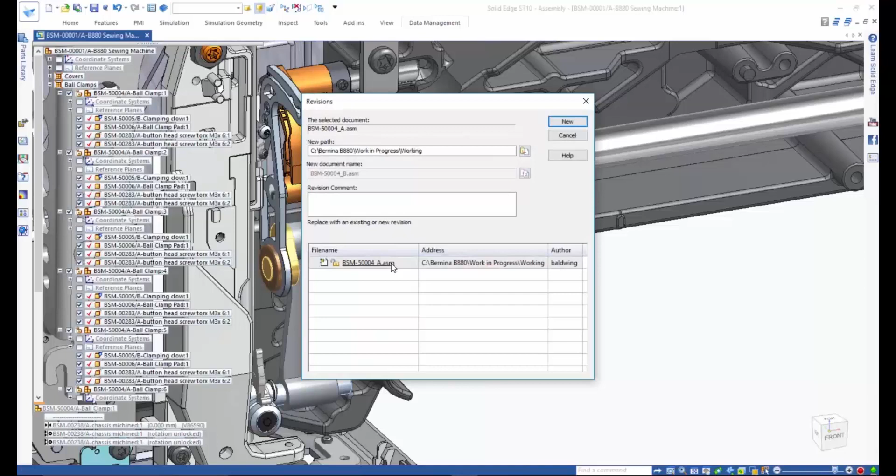The next thing we can do is create a new revision of the subassembly that includes that clamp. The revision command provides exact control over selecting and revising the parts, assemblies, and drawings. So we're going to use the New option to create a new revision of the subassembly, and you can also see here that the draft file is also changed to the next revision level.

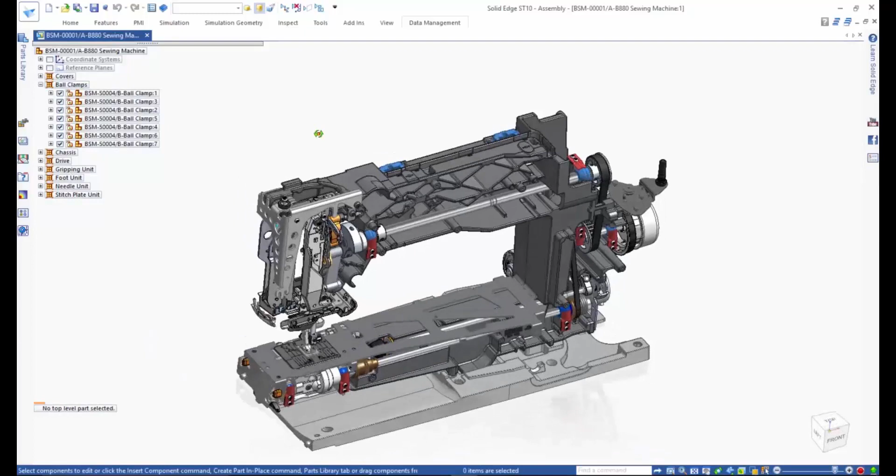Towards the back of the assembly up here, we have a guide model - another part that was highlighted when we ran that Get Latest command. It's flagged with an icon in the Pathfinder that it's not up to date. So we can select that part if we want to, run revisions again, and then get in and actually see the complete revision history of the part.

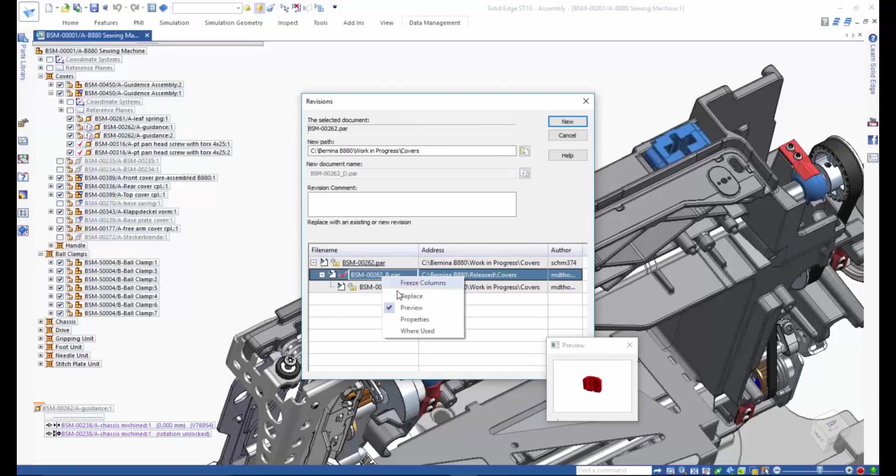The nice thing about this is we can display thumbnail previews of the revisions. We can also see there is a released revision B available, and we can select that revision and replace it. We can also pick if we want it to replace the individual occurrence or all occurrences in the subassembly or the complete assembly.

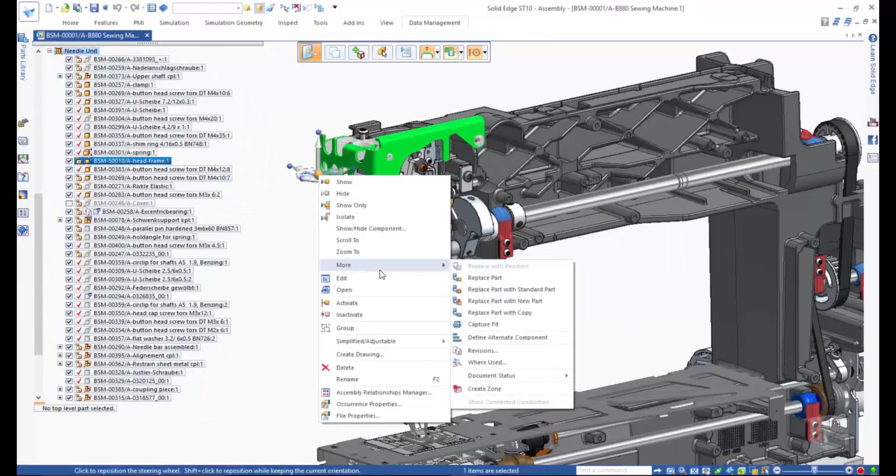You also have the option to create a new part instead of a new revision when performing that replace operation, and we're actually going to do that here for the bracket by copying that existing component and applying a new part number for it. Now the nice thing about this is a new drawing is also created at the same time.

Using these revision management tools, we can easily create individual records of a machine or piece of equipment as it was delivered to a customer and keep track of it as it's maintained and customized. The new part number we set up can be generated automatically using the assign all option, which helps eliminate the possibility of duplicate file names and part numbers.

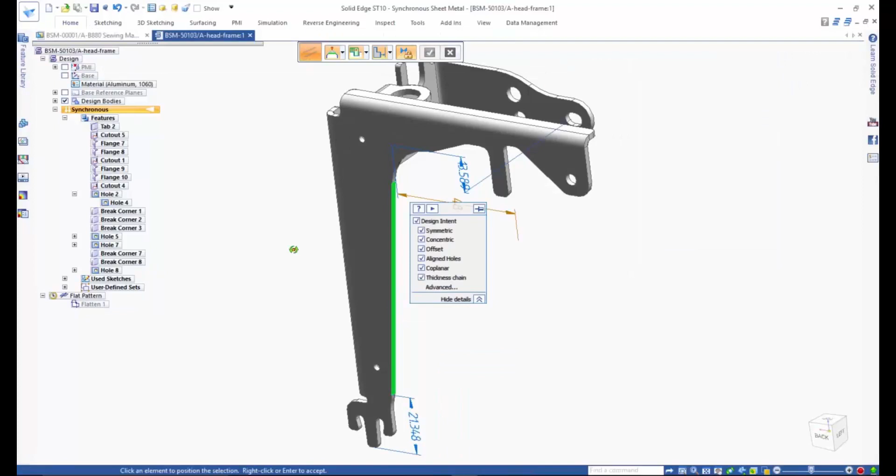Now when we're actually here inside of the part, we can use synchronous technology again to easily make any required design changes. In this example, we're going to quickly remove the holes and modify some of the geometry of one of the flanges.

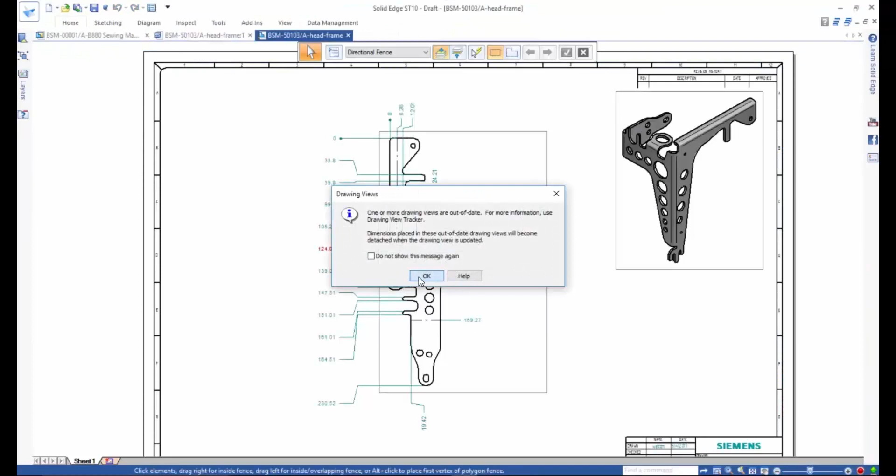One of my favorite new buttons for the built-in data management is the Open Drawing button. This will allow us to directly open the associated drawing for a part, and here we're using it to open the drawing of the bracket and update it to incorporate the new design. You'll notice also down in the title block it's automatically updated to include the new part number.

The built-in Solid Edge data management capabilities help users make design changes easily without having to be too restrictive and without requiring complex and expensive software.

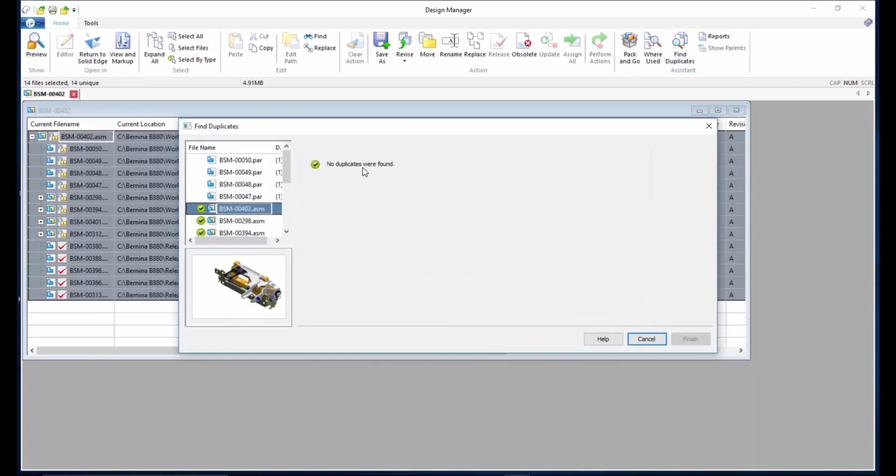What we're going to do next is open up another subassembly and use the Design Manager to work on this model. We're going to start with finding duplicates to see if there actually are any duplicate file names or part numbers. This can arise when a model is brought in from an external supplier or vendor, or from an old design project, something like that.

The absence of any green check marks over on the left indicates that there is at least one duplicate file. The top line on the right hand side shows the file that was used in the assembly. The line underneath shows where the duplicate file is located.

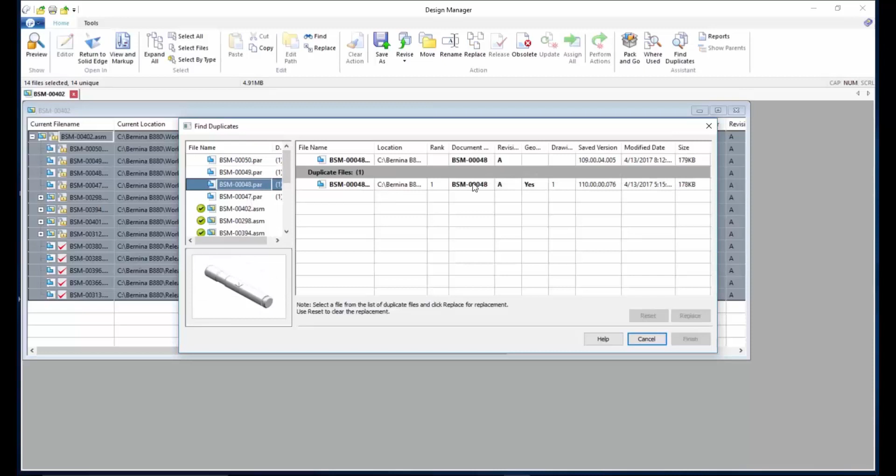Our duplicates can be due to the same file name or same document number, but we also get some nice additional data in the dialog that lets us determine if we're using the correct file, by seeing if there's an associated draft file, when it was last saved, etc. So if the duplicate found is actually the correct file, it can be easily replaced into the assembly.

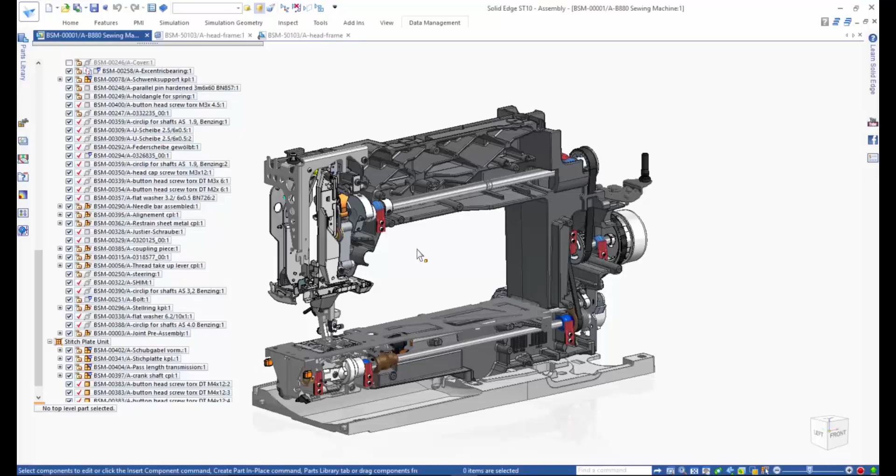The built-in data management capabilities are standard with Solid Edge. You can start using them after running the Windows indexer on the folder where you store all of your files. We have instructions on how to help set that up, just reach out to us if you need help with that. We also have a built-in data management lunch bite that you guys can go back and review as well.

The last thing I want to talk about is the Solid Edge portal that they're working on. This is still in alpha or beta right now, still just an idea, but it should be out later this summer, hopefully for testing. Basically it's a multi-platform, browser-based view and markup type tool, so we can go in and upload files like you would with Dropbox or Google Drive, anything like that.

You can securely house all your files online, and then you actually have a built-in viewer, so anyone can get on there, log in, view any of your part files or assembly files, download and use the files that they need. It's a really nice tool to access your files wherever and whenever you need them, and let anyone else have access to view the files as well. So look for that hopefully later this summer.

To summarize today's lunch bite, the main intent of ST10 was to fill out the entire Solid Edge portfolio. We have things added not only on the design side with generative design, reverse engineering, and convergent modeling, but also on the simulation side with FloEFD, manufacturing, and some new options with CAM Express. With generative design we can even do some additive manufacturing, some 3D printing. There's also technical publications with Solid Edge illustrations and documentation, enhancements to the built-in data management and Teamcenter, and coming soon the Solid Edge portal, plus as always the hundreds of powerful apps available to you guys. So again, that was the main focus of ST10: to fill out that portfolio and get you guys what you need.